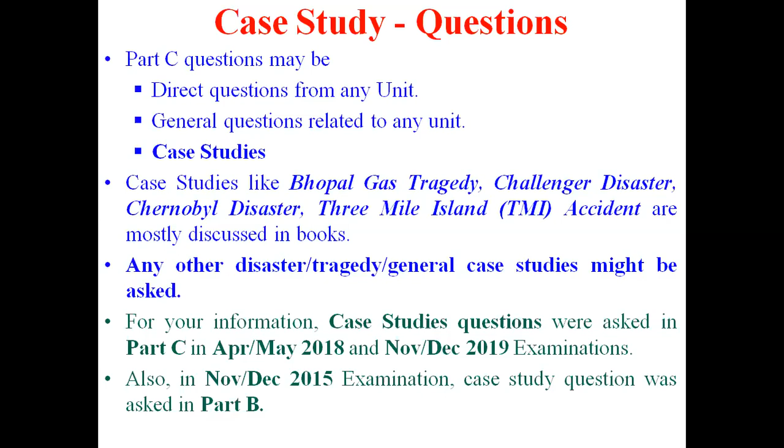Okay, I'm moving to next slide. Chernobyl disaster - background. The Chernobyl disaster was a nuclear accident that occurred on Saturday, 26 April 1986, at the number 4 reactor in the Chernobyl nuclear power plant near the city of Pripyat in the north of the Ukrainian SSR.

The reactor acronym in the Russian language is RBMK, which can be translated roughly to mean reactor of high power of the channel type. The reactor is cooled by water and moderated by graphite. This is the background, the introduction to the Chernobyl disaster - a nuclear accident that occurred on 26 April 1986 at the number 4 reactor in the Chernobyl nuclear power plant in Ukraine. At that time it was the Soviet Union.

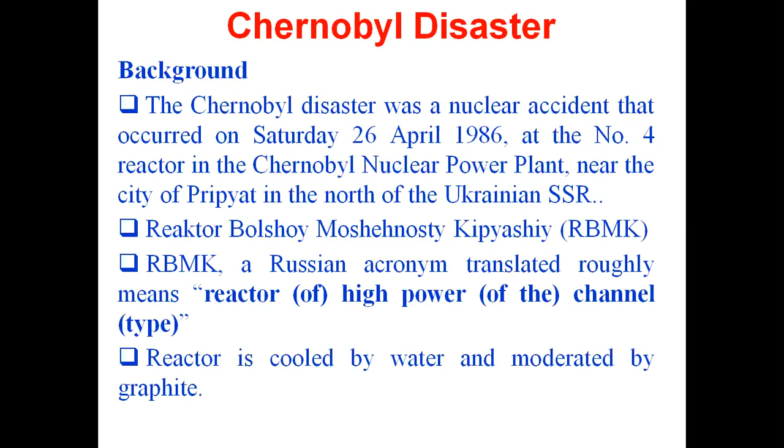Now you can see the RBMK reactor diagram. You can have some idea. We already discussed this all in detail in the class. You already have the course material, this case study material in your hand, so please go through it. Since this is a revision class, I'm just moving faster.

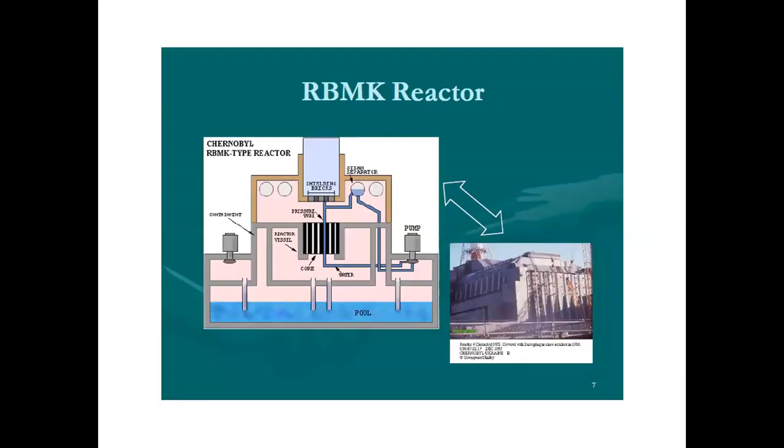Reactor plant scenario: as the reaction occurs, the uranium fuel becomes hot. The water pumped through the core in pressure tubes removes the heat from the fuel. The water is then boiled into steam. The steam turns the turbines. The water is then cooled, then the process repeats. This is the general functioning of the reactor plant. You can give some idea when a question comes - if you may have to explain the nuclear power plant, then the disaster, so you may add these points.

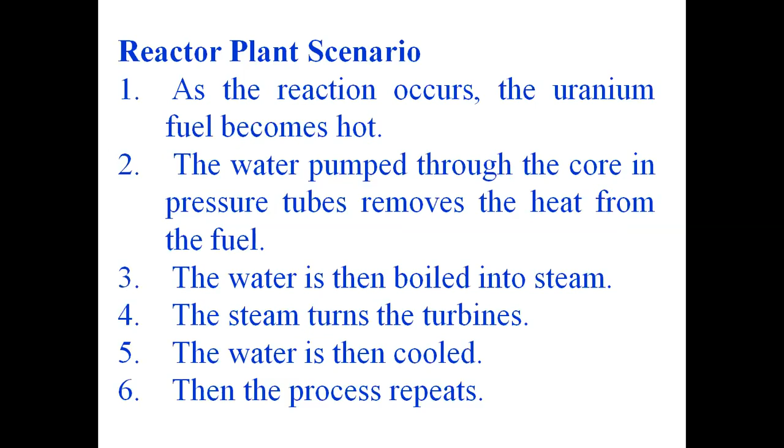This is the fuel assemblies. You can see there are fuel rods. You can see the fuel assemblies from this slide.

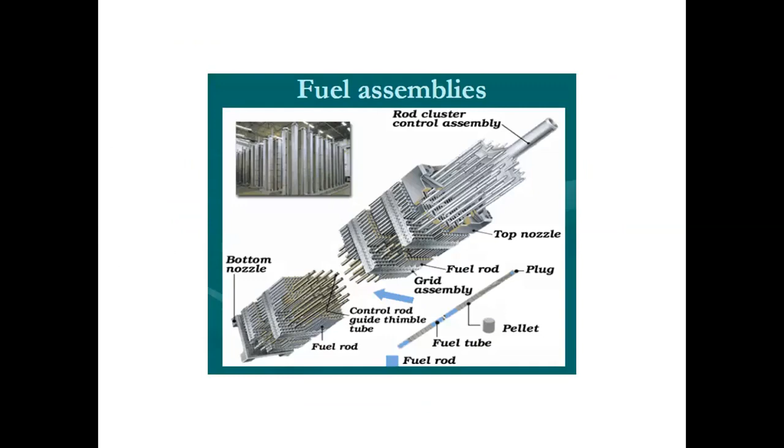Okay, this is day of disaster. April 25th, 1986 - the sequence of events started. Then April 26th, 1986, it continued. So a lot of sequential events - the problem, error, the misfortunes all happened during this period. You can find this from the slide.

1:23:48, that's the time, early morning on April 26, 1986 - the first thermal explosion occurred. Then continuously at 1:23:55, the second explosion occurred. So we can just go through this slide.

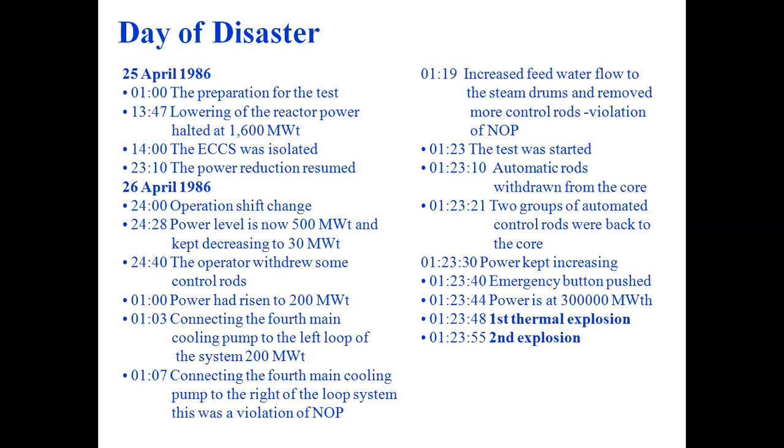Okay, now due to this disaster, what are the casualties? Direct casualties and indirect casualties. As far as the direct casualties are concerned: 5.5 million people still live in contaminated areas. 31 people died in 3 months of radiation poisoning. 134 emergency workers suffered from acute radiation sickness. 25,000 rescue workers died since then of diseases caused by radiation. Cancer afflicts many others - increased birth defects, miscarriages, and stillbirths. These are the direct casualties.

At the same time, people may have indirect casualties. What are the indirect casualties? By the year 2000, there were 1,800 cases of thyroid cancer in children and adolescents. Also, a high number of suicides and violent deaths among firemen, policemen, and other recovery workers - this is the mental problem.

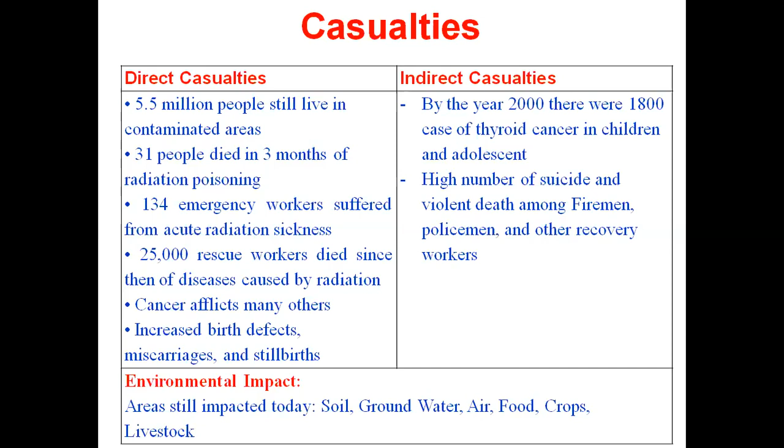Okay, now I'm moving to next slide: human errors, violation - human error and violation.

This one you can consider as a violation of moral, ethical, and professional code of standard in the disaster, or human error.

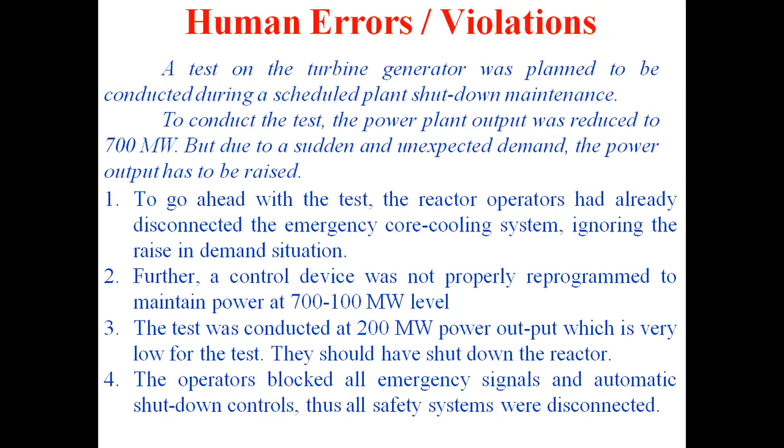Moving to the next slide, same topic. Five, the operators raised rods to increase power output and tried to continue the test. This made the reactor unsafe. The temperature of the RBMK reactor increased and the fission rate increased.

Six, the test should have been postponed but continued. The reactor core melted, and due to hydrogen accumulation, the reactor caught fire and radioactive waste began to spread out in USSR and also Europe. From all these points, you might have noticed there are more human errors, the operator errors. So, mainly due to human errors only, this disaster occurred.

Furthermore, connection of the four main cooling pumps to the right and left of the system is one of the reasons for failure. Then, mental model: the operator did not have a good mental model of the system itself. That is the most unfortunate thing. Then overconfidence: having only one electrical engineer on site for an electrical test, with no confirmation of cues obtained from the system. So overconfidence also led to the disaster.

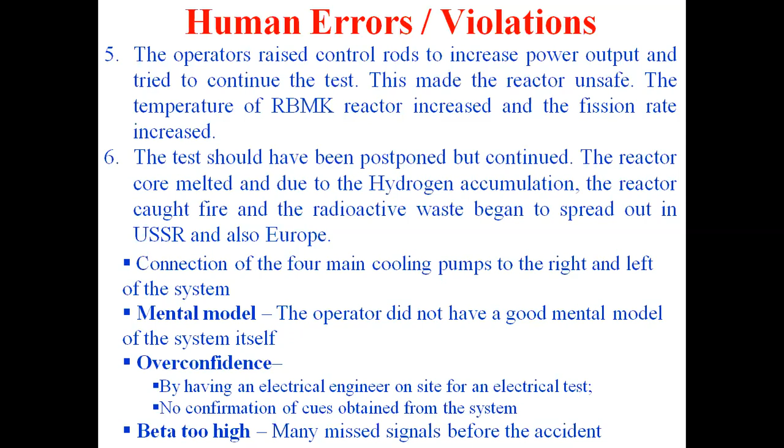Now moving to the next slide, system analysis. This is also a violation under the same category. You can see the previous slide under the heading human errors and violation. Here also you can say violation, maybe mostly violation of the professional code of standards, or a technical flaw.

The use of graphite as a moderator, that is one of the technical reasons. Lack of a well-built containment structure. Then, inadequate instrumentation and alarms for an emergency situation. Then the fourth point, there were no physical controls that prevented the operators from operating the reactor in its unstable state. All this is also reasons for the occurrence of the nuclear disaster.

So we can give the answer from this view, that is, we have to discuss the moral, ethical, and technical, professional code of standards in the disaster. So please take note.

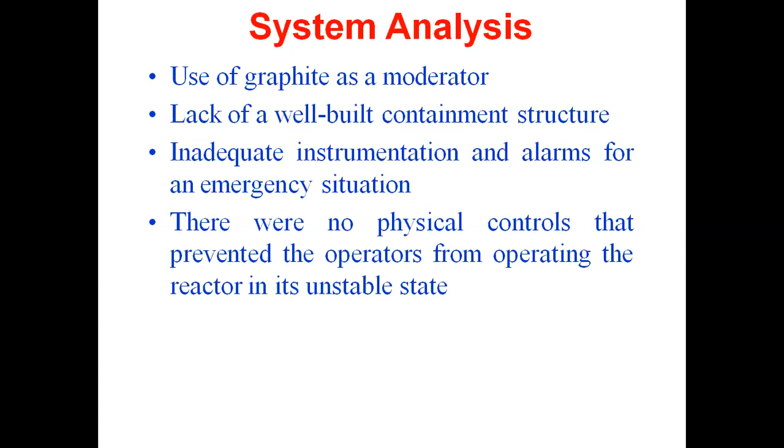Moving to the next slide: safety lessons from the Chernobyl disaster. The disaster occurred. From this disaster, what safety lessons can one learn? This can be considered as a conclusion, so we are writing the conclusion to avoid such disaster in the future also.

Number one, the thickness of containment should be more, to withstand the possible explosion and further damage due to the radiation leakage over the surroundings. Next point, the test should have been abandoned and all controls switched on, then the output should have been increased.

The next point, the decision making on the test and increasing the load should have been with one person, or the decision makers should have coordinated with each other. The next lesson, periodical mock drills of emergency for the operators, so this safe exit should have been arranged.

The last point we listed: the in-stack radioactivity monitoring instrument indicated a rise earlier, the operator should have informed the superior at once. People residing in the neighborhood ought to have been informed and steps initiated to evacuate the public immediately. So these are some observations, the safety lessons from the Chernobyl disaster.

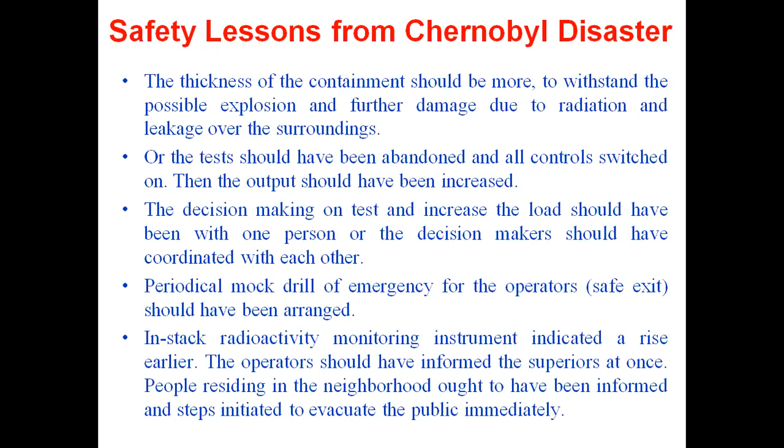Go through my book and my materials, study properly. Whatever question comes in the case study, write nicely and accordingly prepare properly. All the best.